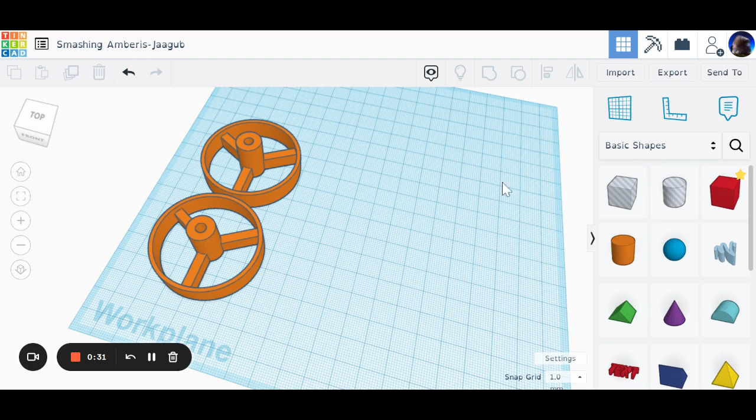It's a very user-friendly program, and students, once they've got past the basics, make rapid progress, okay? So just be prepared. They will be showing you things that they've discovered and how to do. So it's a pretty good picture, isn't it? Okay, let's have a look at what Tinkercad's all about. So you get a work plane here, which is like a build platform. I've left these wheels here to show you something on purpose.

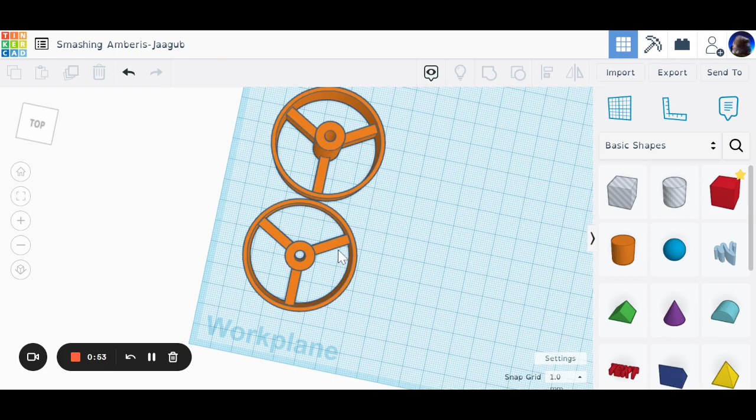So this is the students' work from Year 7, and we do this rubber band racing car project. And in that, we have students who have to create wheels for a car powered by a band. And they've done some pretty complex stuff in here. They've understood the concept of concentricity, circumference and diameter. We go over with them specific constraints like the size of an axle and stuff like that. And they've done rotational patterns, and that's a lovely piece of CAD work there, right?

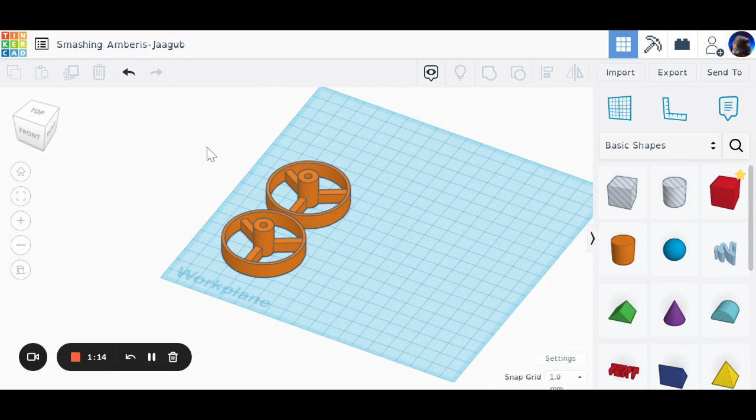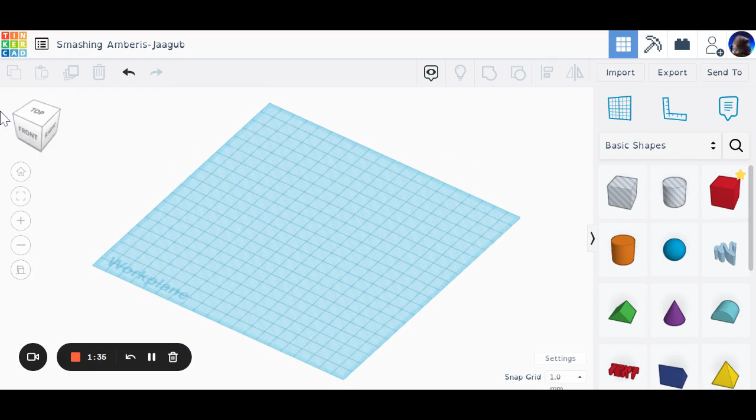So that's what they do with us in Year 7. So if they can do these fan designs with you in Year 6, then I'd love to think that they'd be able to be zooming ahead when they come into Year 7 with us next year. All right, so let's have a look. I've put the drawing plane back into perspective mode from what they call orthographic mode. You might prefer it in the flat mode. On the flat mode, you can look at it from the side, from the top, and things like that using the view cube, which you might find very useful.

I don't know. Let's have a look, right? I sometimes quite like perspective. Anyway, let's have a look where we're going to get started. So we're going to try and design some devices that are going to be able to catch the wind. That's the whole idea, isn't it? So let's have a look. I'm going to bring in from my primitives menu, so this is what we call my primitives menu, something that I'm going to use as what we call a nacelle. So the spinning part or the center part of the wind turbine, okay?

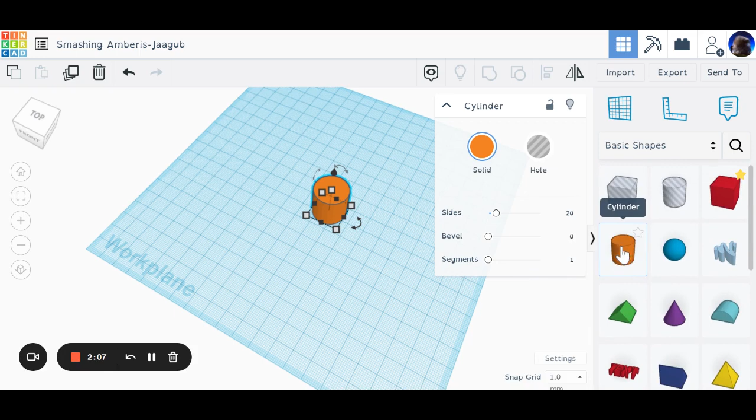Now, anything that comes in when you drag it in comes in with a default size of 20 by 20 and 20 high. Now, you can change that if you want to. Just click in these numbers here. Let's make it 30 by 30. There it is, look, 30 by 30. Okay, next job then, right? Well, I'll tell you something clever you can do, I guess. Let's just zoom ahead a little bit.

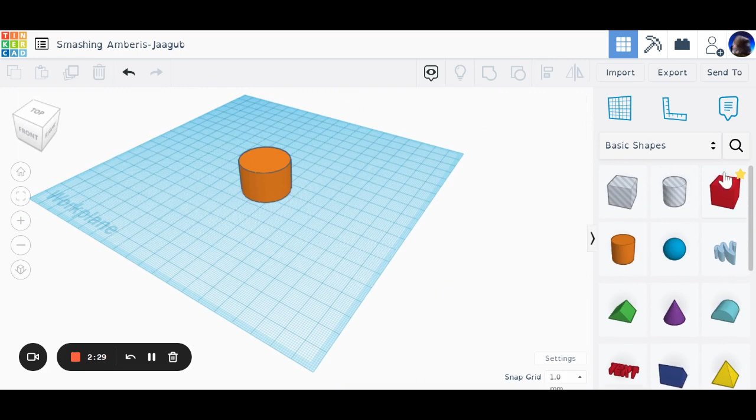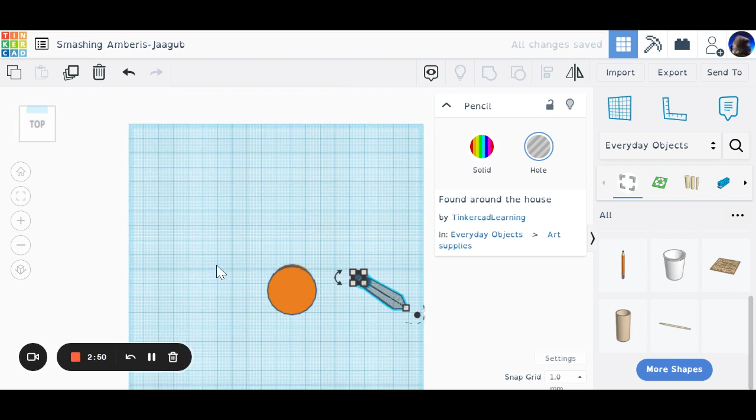So where you're in your basic shapes, primitives, there are loads of shapes you can explore. So if you go to everyday objects down here and have a search around, you will find a pencil. Now that pencil is a life-size pencil, right? And what I can do is I can use that pencil to create a hole. All I need to do is, let's switch back to 2D mode, make sure I put the pencil in the middle of the hole of the orange circle.

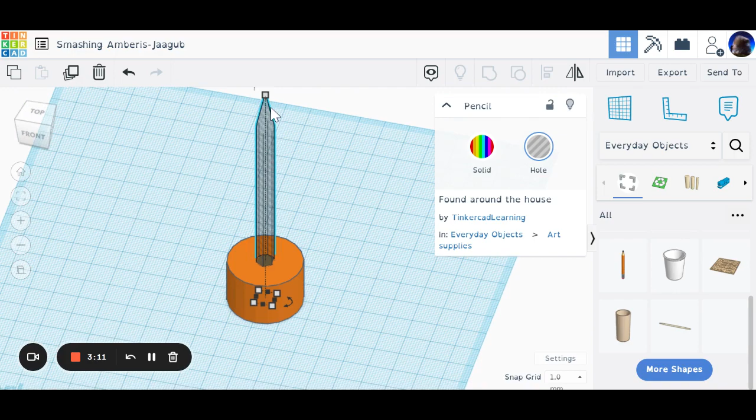So I'm just going to go to my align button over here, align, click on this orange bit, click there and click there, and that's put the pencil right in the middle of my orange nacelle bit. Okay. Now if I want to lift things up and down in Tinkercad, I've got to use this little black triangle at the top. Now I'd like to make that hole going through my nacelle. So what I'm going to do, I'm going to lasso everything and I'm going to group it.

And what it'll do is it'll take away the pencil from the other shape and create a hole. So we've already learned quite a lot of basic stuff there, right? Importing things from the primitive menus and other menus as well.

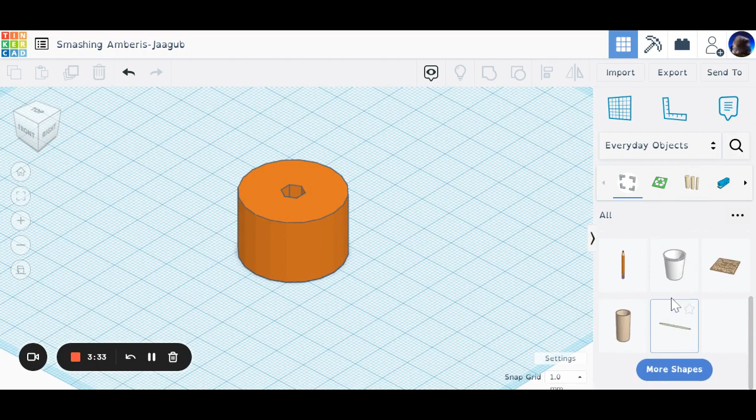Like they might be messing around with paper cups and stuff like that for their device. These are paper cups. That's a full-size paper cup. You could use that if you wanted to. Let's go ahead and use it, shall we? Right, look, I'm going to bring that paper cup back in. Come on, paper cup, back in.

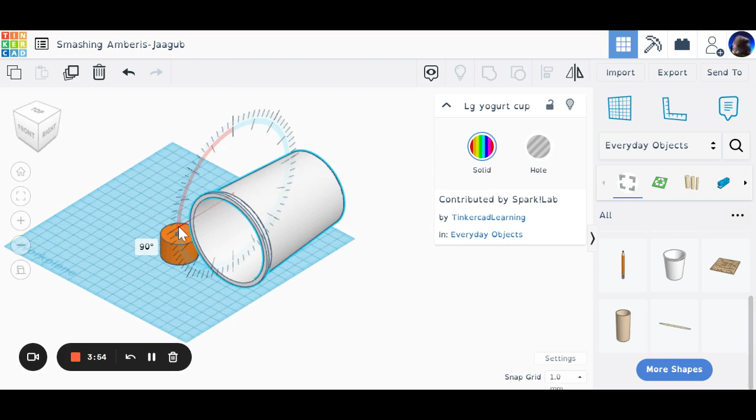There it is. Now, if I want to use that paper cup, but I want to spin it around, you've also got these drag handles that you can use, look, and you can spin things around. So there's a drag handle, and I could put that paper cup there, look, I could lower him down. I could make a copy of him with a copy and repeat button at the top.

I can bring the copy and repeat one over here. I can use the flip button. I can flip that over, look, and I've got the basic starting point of a device. I'm going to get both of those pieces and I'm going to use my nudge arrows. That's the arrows on the keyboard. I'm going to move them over.

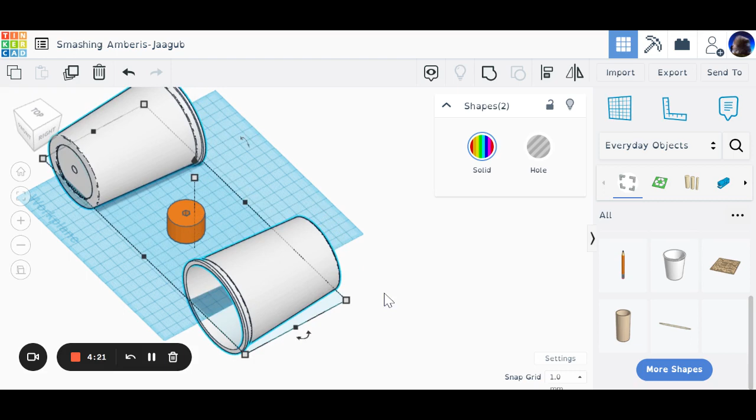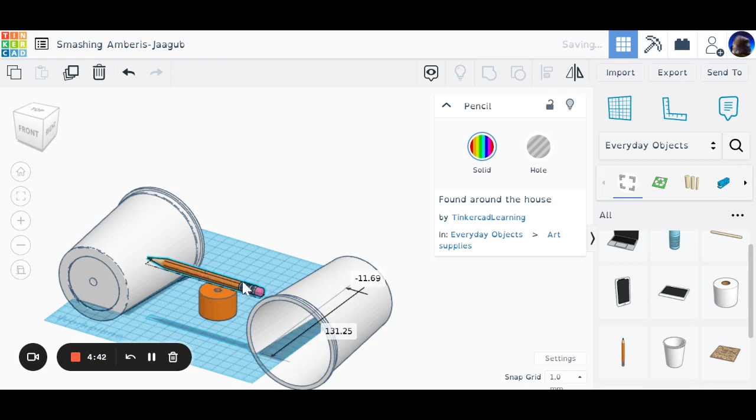Okay, let's go back into using a pencil again, right? If I bring that pencil, I grab that nudge button, pull him over 90 degrees. So you've got to be careful when you rotate stuff, right? Control Z and undo. If I just pull that over 90 degrees, I should be able to somehow make that so it fits, I don't know, with just some glue or something, I guess, onto the top of that. So I bring that over so it's in line with the top, and then I drop that down.

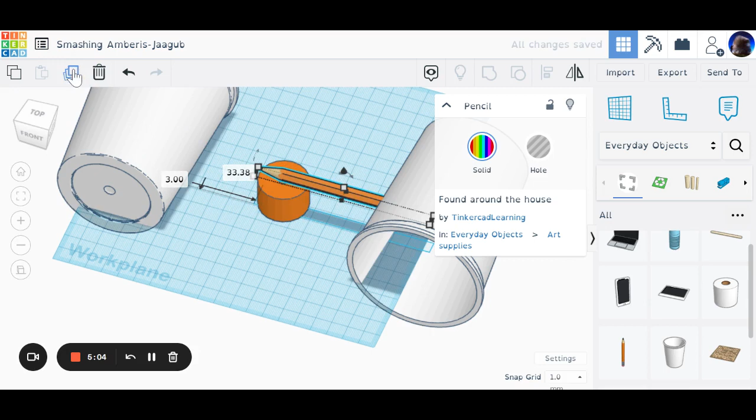This could be a piece of wood. I don't know. If you've got access to a little drill, you could drill a hole in that, and then we could maybe use those pencils to fix these pieces in, duplicate and repeat, bring a copy of the pencil over this way, like that, maybe fitted side by side, maybe a cable tie or something like that. But you've already got there something which is going to catch the wind if you fix all that together, possibly. I don't know. That's the whole thing about it, isn't it? Experimenting and having a bit of fun.

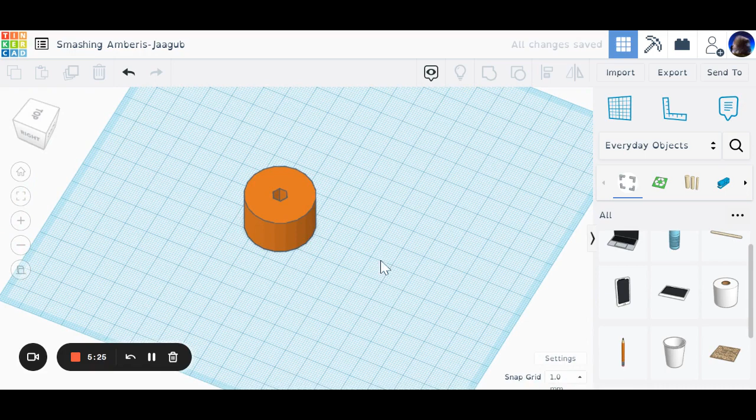So let's have a look at making a custom made sort of fan though, right? Okay, so look what I'm going to do. I'm going to go back to my primitives button up here, basic shapes. And I'm going to use something like a cuboid there, right? So like I said, everything comes in 20 by 20 by 20. You can type numbers in, or you can just stretch stuff if you want to. Like now, what I'm doing on that one is I'm squashing it and making it shorter.

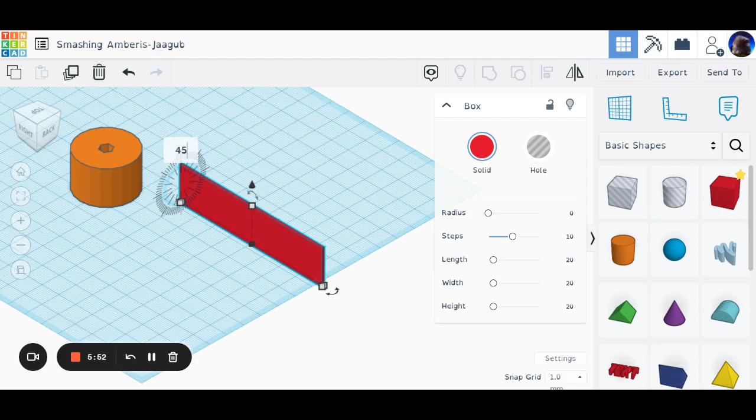Right? If I want to make that into a propeller blade, all I've got to do is put a bit of a pitch on it, ideally 45 degrees, and that, look, is going to be able to catch the wind. Let's have a look what else I've got to do. I'm going to bring that in line with the center of the orange bit now. So you might have seen this before. If you lasso things and go to your align button, click the target, click that to align it.

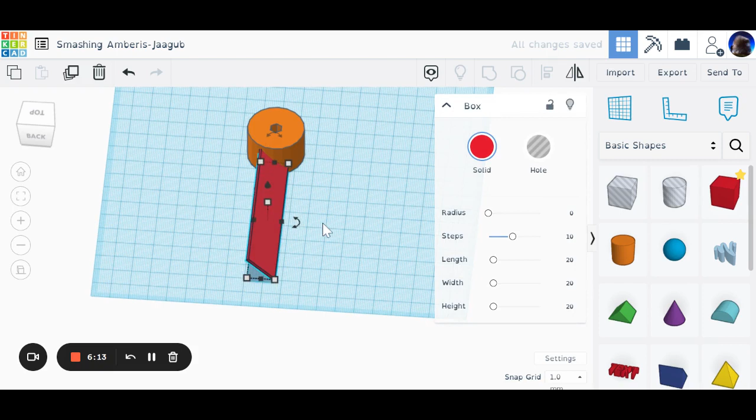Now I'm going to grab that piece. I'm going to use my arrow on the keyboard and I'm going to push that into the shape. Next job, I'm going to duplicate and repeat, and I'm going to push the copy this way. And what I'd like to have is a bit of symmetry going on. So I'm going to click on top. I'm just going to eyeball it.

So does it look the same? It looks very similar, yeah. Right, now for a propeller, those two need to be facing the opposite direction. So what I'm going to do, I'm going to click on that one.

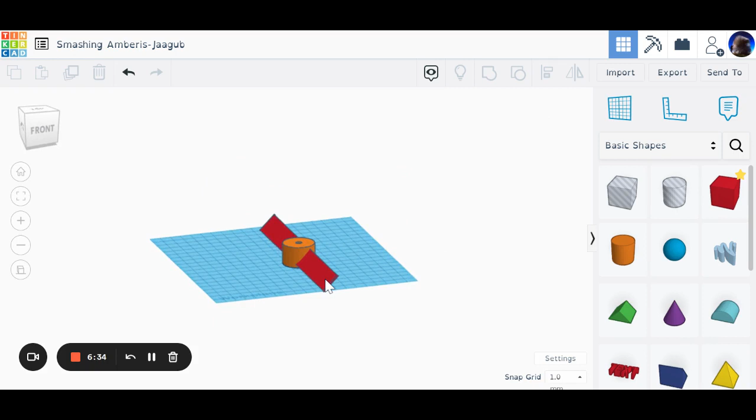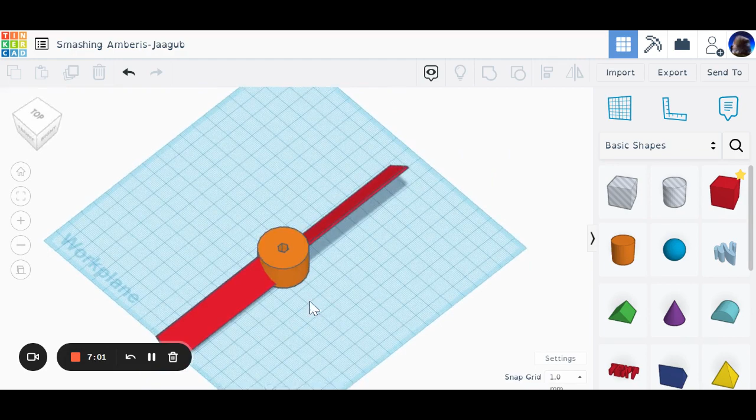I'm going to go to my flip button and I'm going to flip it that way. So for a propeller, that's looking a lot better. I mean, you could make that in a workshop as well with some simple tools. Like I use a broom handle dowel for that. Drill a hole. You can't drill a hexagonal hole, obviously, but you could drill a hole. Maybe hot glue, maybe Blu Tack will do the job, and then you could cut two slots and you could fix some cardboard in, couldn't you? If your students could do that, I reckon you could probably do that yourself for them. All right, but that would create you some kind of wind turbine.

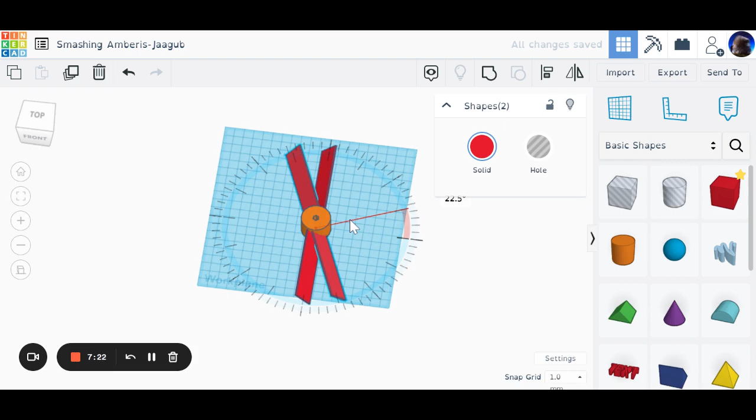If you want more blades on it, let's have a look what we can do for more blades, right? Because this is quite a useful feature. Click once, hold the shift button down to multi-select, click again. So you've got those two things selected. Duplicate and repeat. So you've made a copy of those two pieces and then drag with your drag handle around. Okay, I've gone 22.5 degrees around there. I think you saw that.

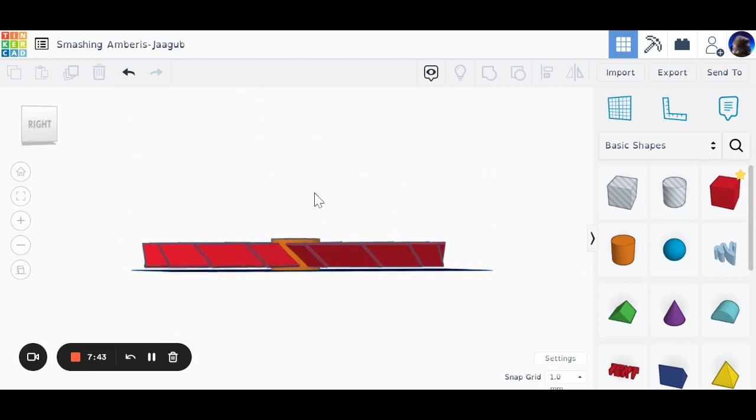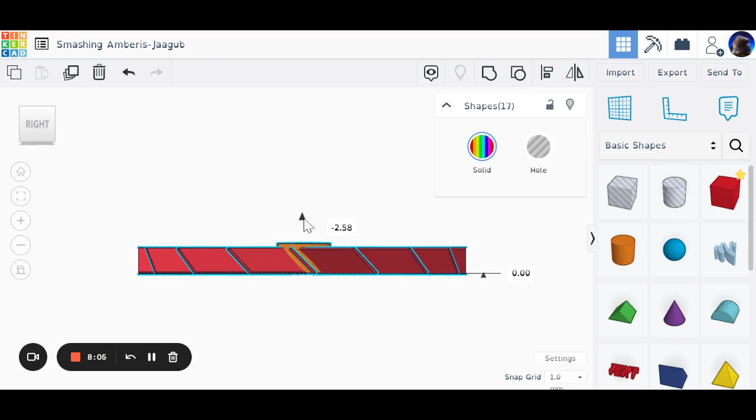If we wanted to 3D print that, we'd have to do some stuff like making the base bit shorter, so it's the same height as the blades, and then bringing the whole thing down. So grab everything, click to the right view there, I can just pull everything down to the work plane so it says 0. So we could 3D print that object, probably without any supports or anything. So that'd be pretty cool.

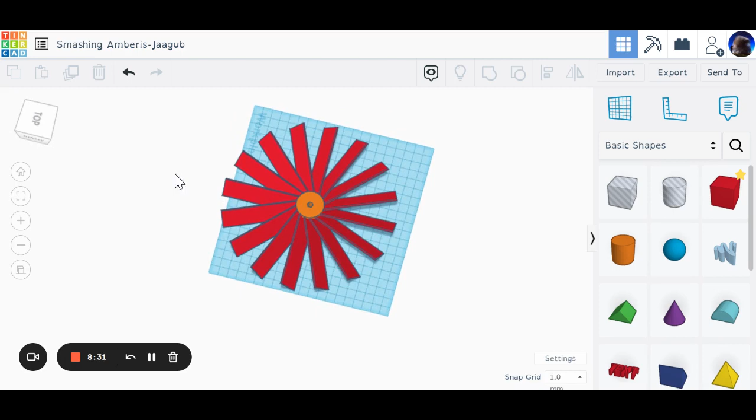It's pretty massive though. So if you count, oops, control Z. If you count squares on that, like the build platform on my printer, I think it's about 22 centimeters. 1, 2, 4, 5, 6, 7, 8, 9, 10. Yeah, about 20 centimeters across. Okay, but you can make that smaller. You can grab the whole thing if you want to. You can group it, and then you can resize it. So let it all group up. It should all go one color once it's grouped. You can make it all one color if you want to.

Now the problem will be if you resize this, look, then the hole in the center has been shrunken. It's now smaller than a pencil, but it's a bit of a better size to print out. You might find you've got students with 3D printers at home. They could be creating things like this if you want them to. They obviously like a good project, that sort of student who has access to that at home.

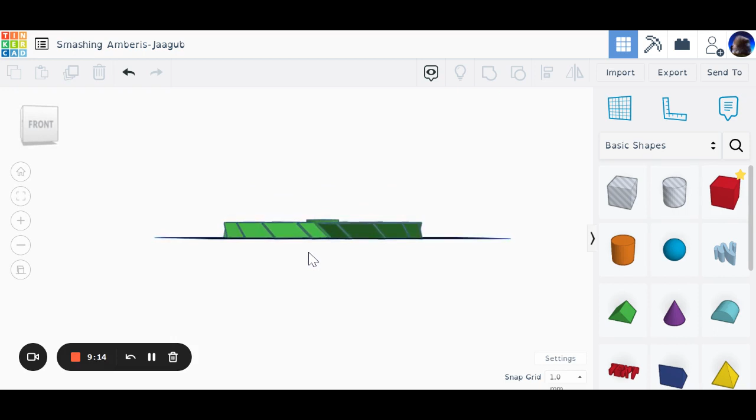So yeah, if you want to 3D print that object, you have to check a few things out. You know, if you're print savvy you'll know what I'm on about, it's got to be self-supporting. Otherwise, you've got to put a load of support in that's got to be broken off afterwards. It's got to be sat flat on the work plane as well. That's the thing. It's got to happen.

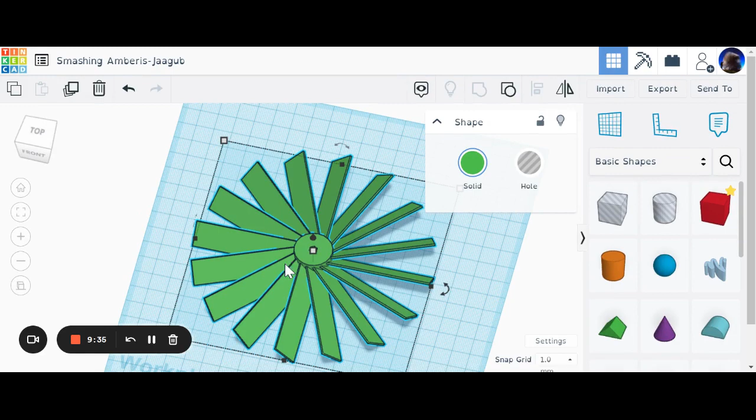Okay, next thing, if you want to 3D print it, right, select the thing you want to export. Click Export, click STL, and it'll download an STL file for you that you can import into your 3D printing software. And that's that. I think really it's just a case of getting started with it, and the more you do, the better you'll get.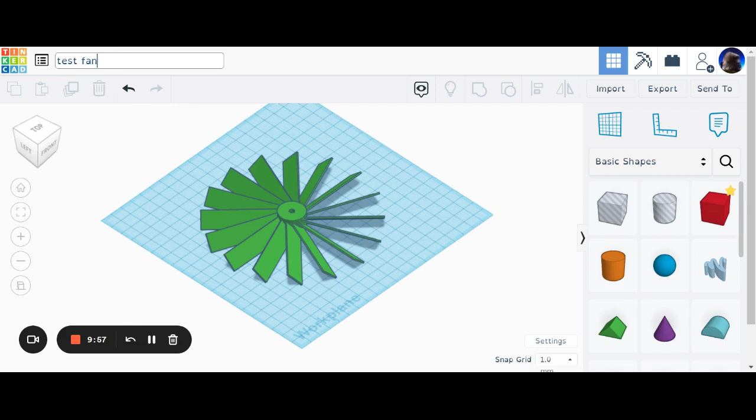It randomly names objects as something, so you might want to just click on that and rename it. So test fan would be a good name for that, wouldn't it? I've got lots of test fans there. I think I'll probably call that one test fan 6, I think I'm on. And I've got a copy of that. All right, there's 10 minutes.